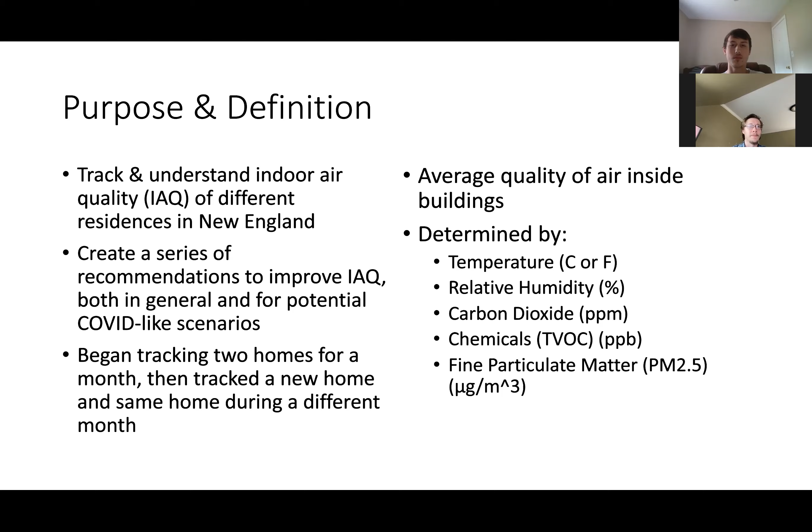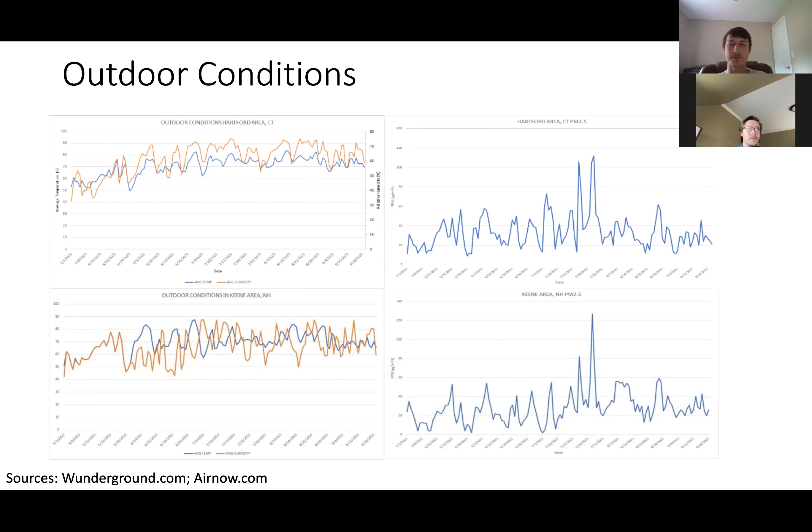In order to properly collect data from which we can draw conclusions, we have to ensure that the data collection methods we use are sound. During this research, we measured IAQ variables using an Awair home sensor, as well as measured building air tightness using blower door tests. The Awair home sensor is a small device that has a collection of sensors that allows us to measure these different IAQ variables.

A blower door is a powerful fan that mounts into the frame fitted to the jamb of an exterior door. The fan pulls air out of the house, forcing air through the envelope of the structure through penetrations and transitions. Blower doors are useful for quantifying the air tightness of buildings by measuring the cubic feet of air moved per minute, or CFM, through the envelope of the building.

For our research, we used ACH 50 as a metric to determine the air tightness of buildings. ACH stands for air changes per hour. This refers to the number of times that the air indoors is entirely replaced every hour, with higher values being worse.

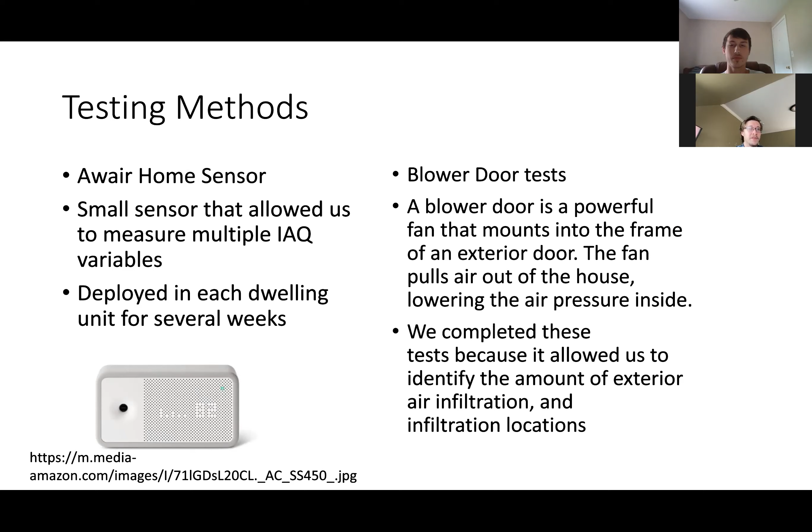When completing these tests, the micromanometer presents us the flow of air as well as the pressure difference between inside and outside. This number is how much air is moving in and out of the building at a specified pressure, in this case at 50 pascals. This is known as the CFM 50.

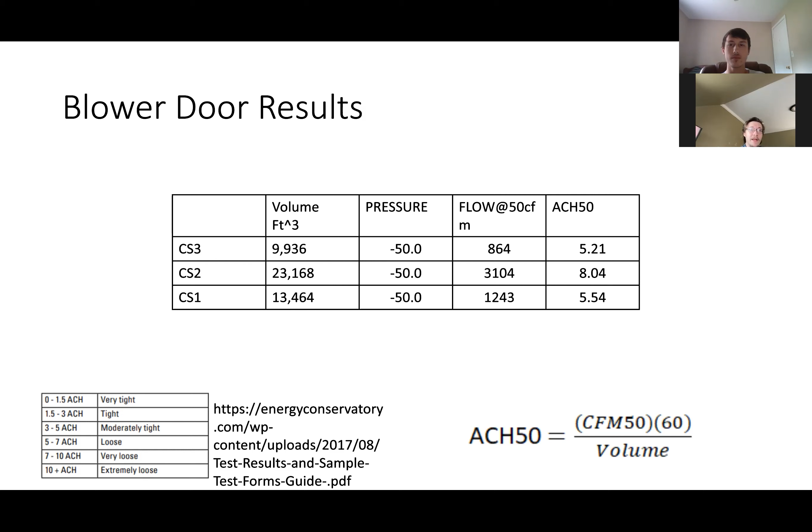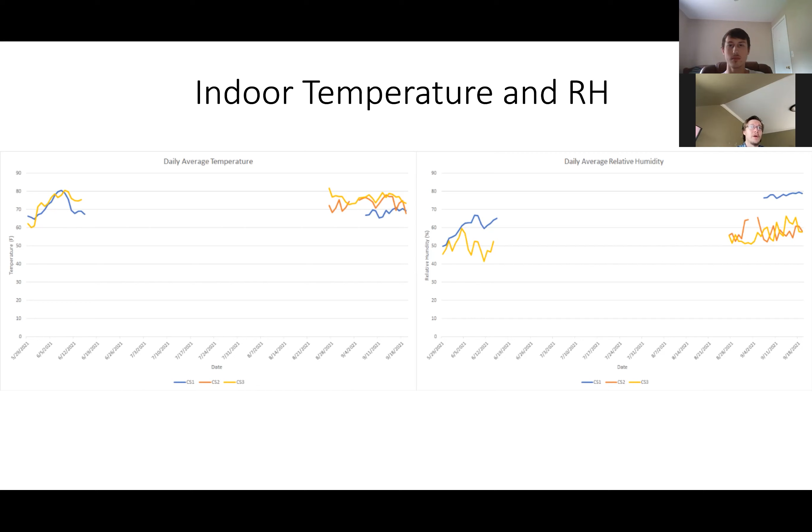Meanwhile, relative humidity acted inversely to the behavior that the temperature data had. Instead of remaining consistent, the relative humidity often fluctuated greatly and was often dependent on what the exterior conditions for relative humidity were. The homes that had a tighter construction fared better in this phenomenon, while homes with looser construction were the strongest candidates for this. Typically in residential settings, machines that regulate relative humidity are not installed, while machines that regulate interior temperature are installed.

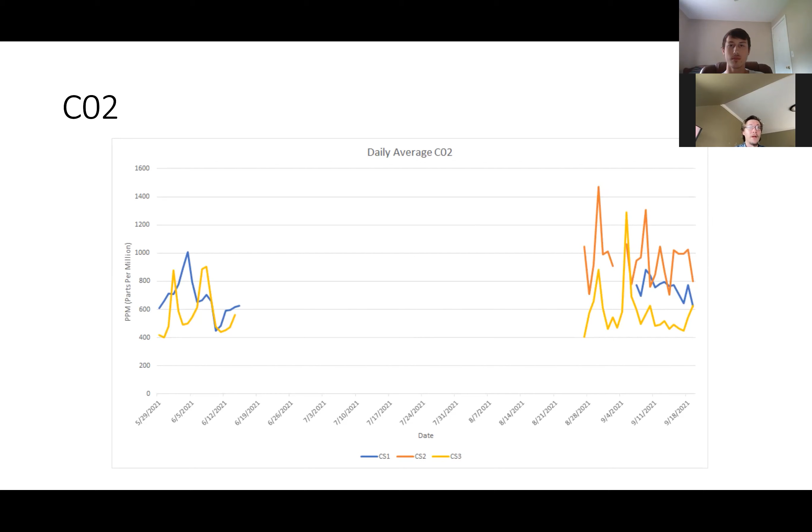Next up, we'll review the data for CO2 concentration. High levels of CO2, above 1,000 parts per million, often indicate poor ventilation and the presence of other pollutants. Typically, the highest levels of CO2 are recorded during hours where people gathered in the house. Think morning time before work or school, and times when everyone would have returned from their days. Oftentimes, this led up to a buildup of CO2 that was too much for the HVAC system to effectively remove. Meanwhile, CO2 levels were lowest when people went to school or work, and there was no one present in the house.

VOCs, otherwise known as volatile organic compounds, are organic chemicals present in homes. This value typically fluctuated with times when cleaning. Fine particulate matter acted in the same way that relative humidity behaved. It oftentimes was dependent on what was occurring outdoors at the time. This is another sense that people do not have, and therefore it makes sense that PM 2.5 is something that is not focused on as heavily as other variables.

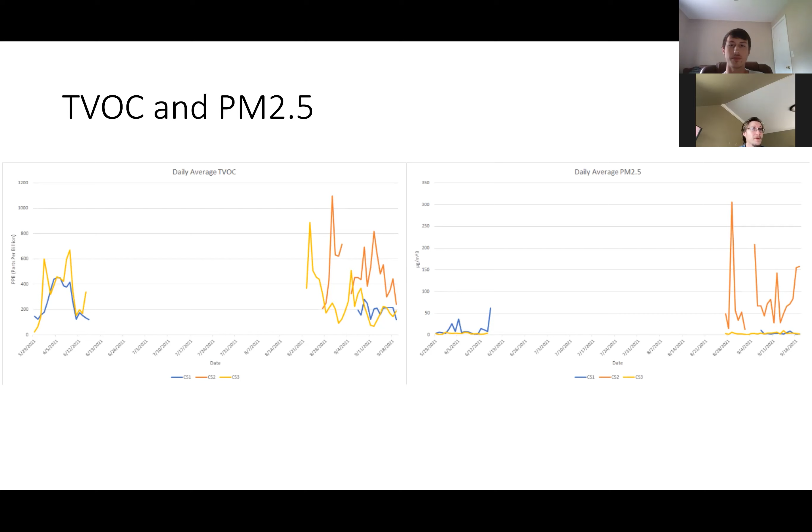Now we will review the results that we have found in our research. To start off, interior conditions often vary according to exterior conditions, especially seen in houses with higher leakage rates. Airtightness is key to being able to control interior conditions. Another important consideration is existing standards created by building professional associations. One of these, ASHRAE, creates and maintains HVAC standards.

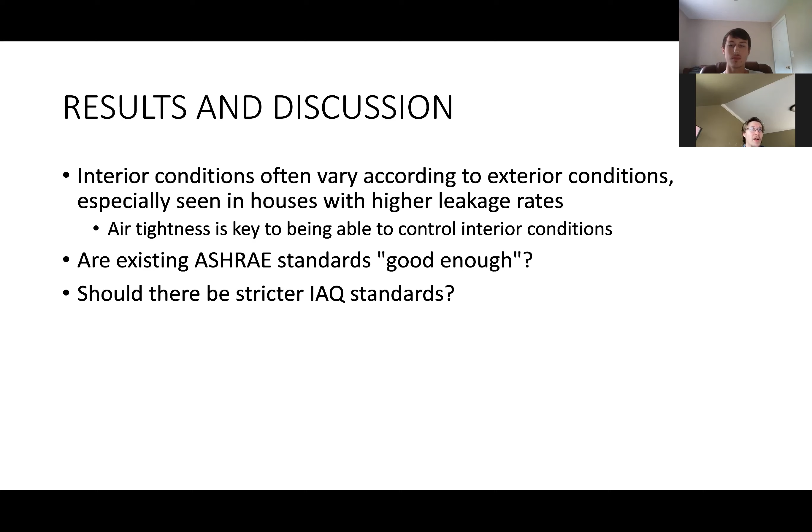Although residential ASHRAE IAQ standards may have been enough in the past, given that pandemic and COVID are continuing to be themes that appear in the IAQ discussion, we have to ask the question of, are these standards good enough? Do we need to revise these standards to reflect the expectations that continue to change as the COVID pandemic continues to evolve? Finally, we need to consider if there should be stricter IAQ standards in general. Although temperature is the main element that is regulated in conditioned interior space, perhaps we should begin to shift our attention to other IAQ variables that have received little to no attention in the past.

As we continue collecting and compiling this data, we can begin to create a list of recommendations for existing and future structures. Some of these include increasing CFM in buildings, which in turn will remove greater amounts of virus particles in air. Increase building airtightness and HVAC systems. Implement HEPA filters into HVAC systems that will trap COVID-19 virus particles in filters. This could be very costly, but there do exist cheaper options that could achieve similar results.

For cost effectiveness, buildings could also implement filters that are MERV 13 or better. And increase monitoring of IAQ variables in homes and implement IAQ variable management systems. Finally, when designing HVAC systems, the architect and mechanical engineer can and should create physically separate areas with separate HVAC zones that can be used as quarantine spaces in the event of a pandemic.